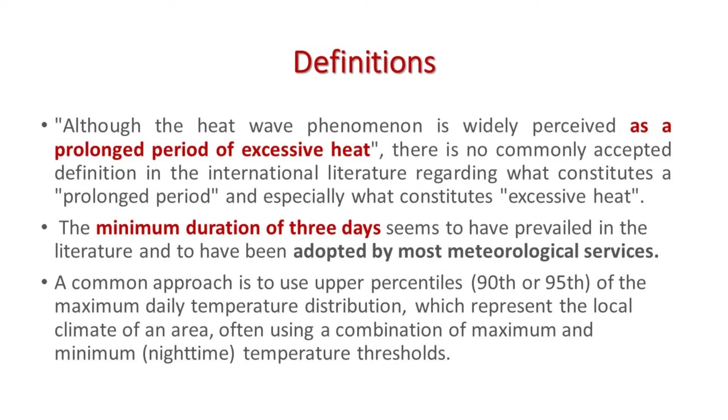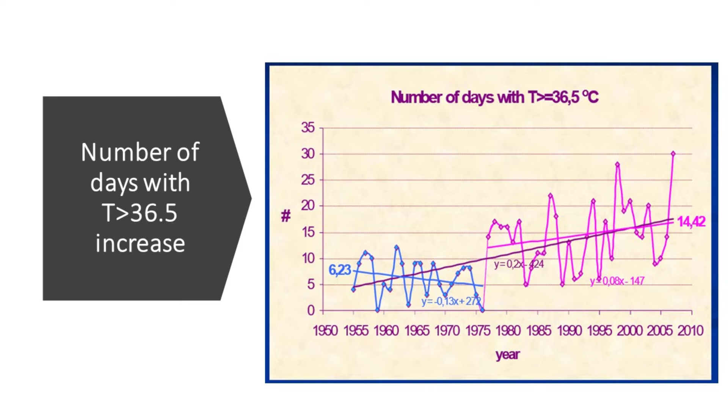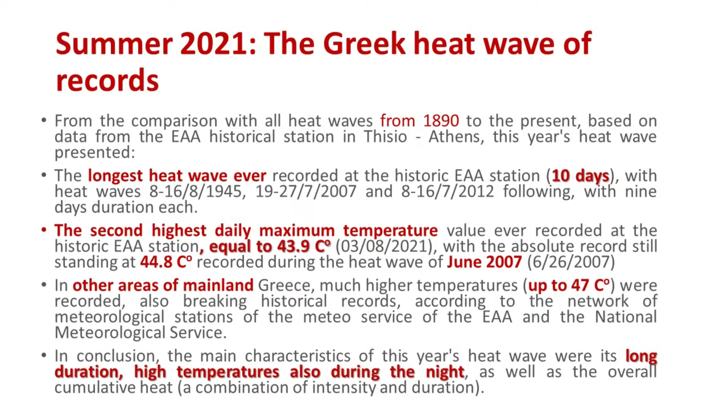And we arrived at summer of 2021. The Greek heat wave recorded was really the longest heat wave ever recorded in Athens. The duration was 10 days, and it had the second highest daily maximum temperature, equal to 43.9, almost 44 degrees, comparable with the first one in June 2007 at 44.8.

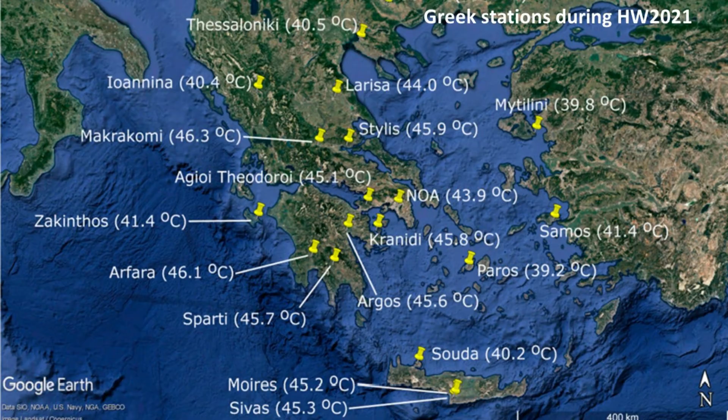In other areas of mainland Greece, we had even higher temperatures, up to 47 degrees, and the conclusion was long duration, high temperature also during the night, as well as all the cumulative heat that we had all over Greece. As you see, from Crete we had a temperature of 45 up to Thessaloniki with 40.5. It was really a nightmare.

As you also had this summer in France, we had fires everywhere in Greece, and the result, as you see especially in Evia Island, was a really big ecological disaster.

So if we go back and try to understand bioclimatic architecture and popular knowledge, we see that the construction of buildings once upon a time functioned as living organisms in direct connection with their natural environment, presented as a capable solution to the energy and social crisis of our times.

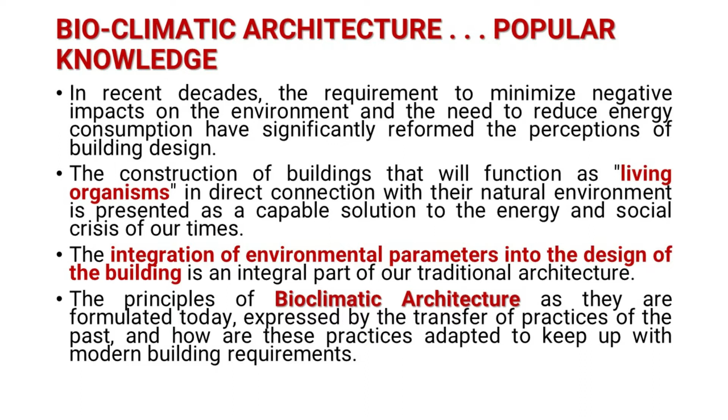The principles of bioclimatic architecture, as formulated today, are expressed through the transfer of practices of the past, and how these practices are adapted to keep up with modern building requirements. This is a good example of modern bioclimatic architecture, emphasizing limiting energy consumption from non-renewable sources, saving water, avoiding overheating of buildings, and of course the choice of building materials and methods with ecological criteria.

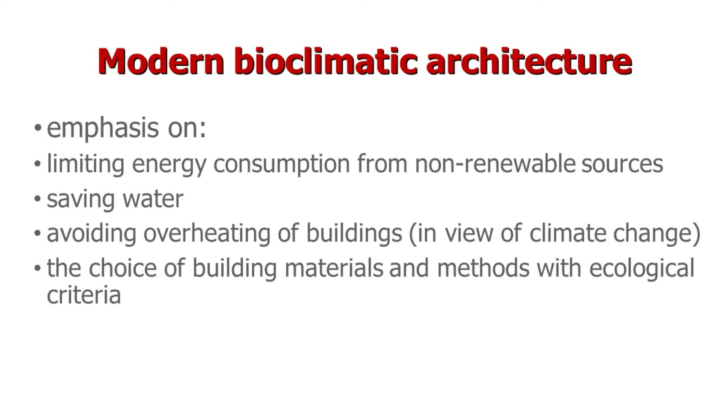We have really made very big progress in how we can build with bioclimatic processes and principles. The question is what could be useful to our new vision of environmental protection from the traditional folk architecture in Greece.

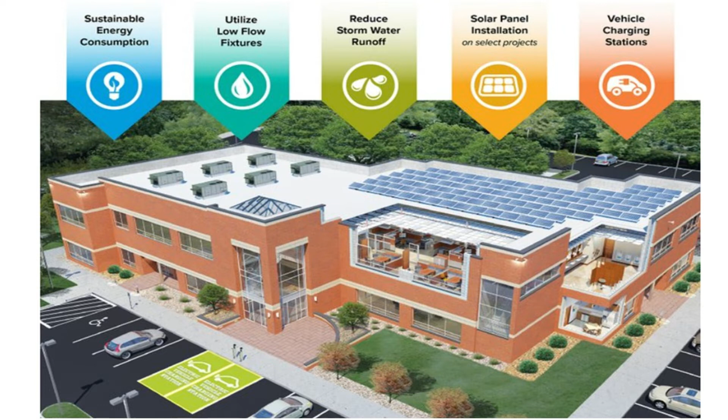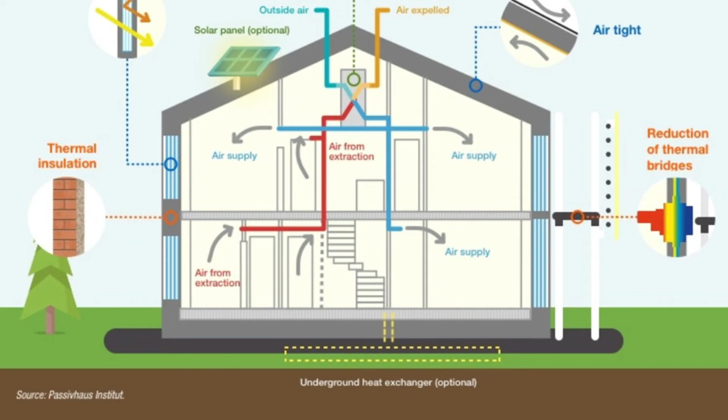The characteristic of traditional architecture in Greece was freedom, improvisation, and independence from any style or theory. The traditional builders, guided by weather conditions, the economy, and the available materials of their region, adapted their techniques to the conditions of their place in a natural and effortless way.

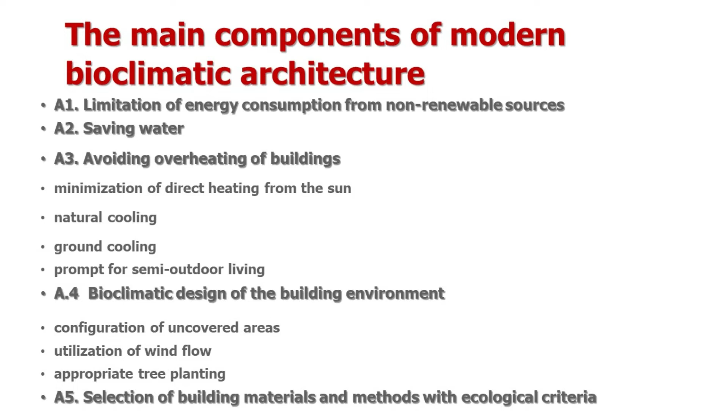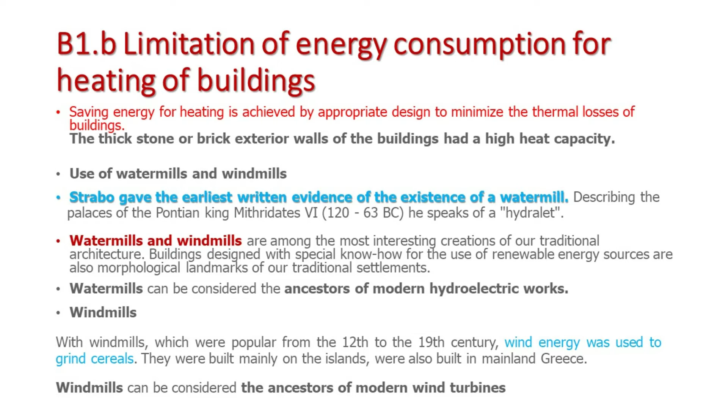For centuries, we used also water mills and windmills, and actually the first written evidence about the existence of a water mill in Greece was from Strabo, about the palace of the Pontic king Mithridates, around 120 to 63 before Jesus. And all those water mills and windmills had really something to add to settlements, traditional settlements. Especially the water mills can be considered the ancestors of modern hydroelectric works that we have actually, factories. And the windmills can be considered the ancestor of modern wind turbines.

And we passed to the save water and cisterns that it was really important, especially for the Cyclades islands, because the lack of water was really tremendous. The saving of water in traditional buildings located in areas without rivers, like the Cyclades islands, was carried out by collecting rainwater in cisterns. The cisterns are located in the basement of the building, and there were also outdoor cisterns that were covered. The rainwater is mainly collected on flat roofs and led by kiugia, the Greek clay channels, to the cistern.

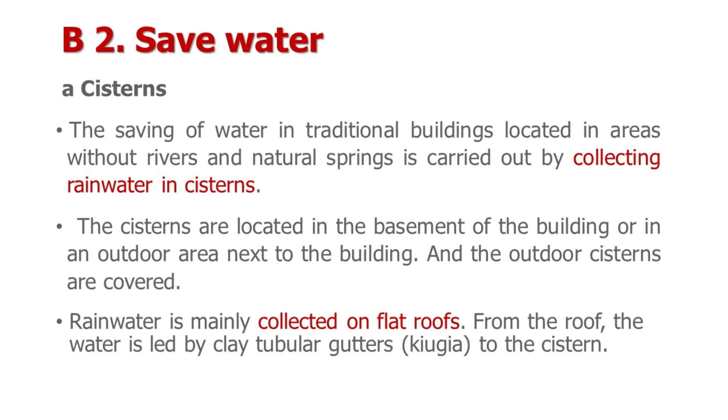Perhaps, obviously, a lot of you have visited already Santorini, but due to their soil, that was volcanic, Santorini has an impressive cistern labyrinth of a lot of cisterns that really gives a lot of water from rain every year.

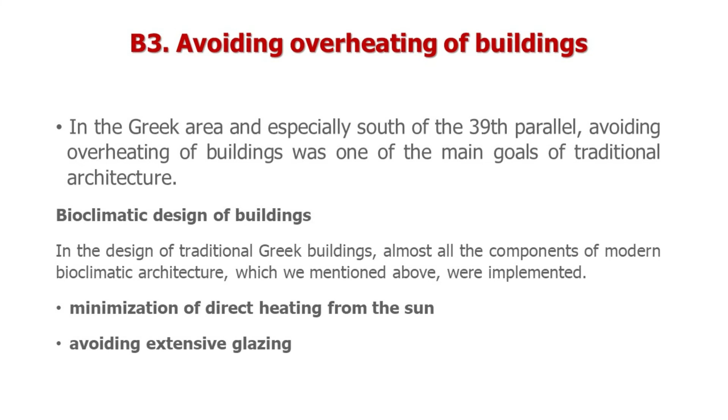For avoiding the overheating of buildings, we use techniques to minimize the direct heating from the sun. So most of the houses in Cyclades are white because most of the long wavelength solar radiation is reflected and does not heat the building. And modern researchers refer that the example of Cycladic settlements and other settlements in the Mediterranean have, for centuries, protected people from heat waves.

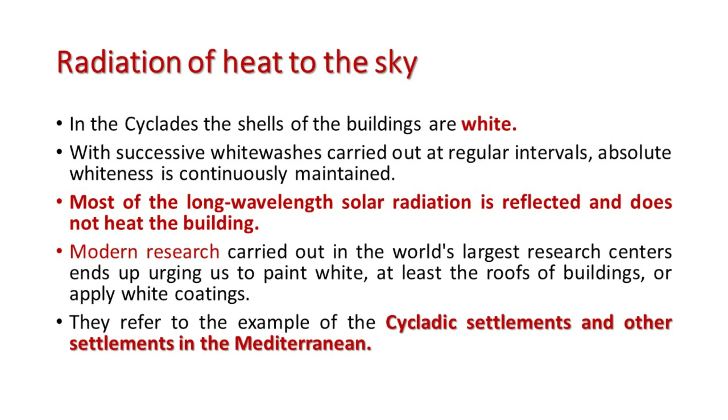Another technique is external shading by canopy with arbors, as well as planting suitable plants in suitable positions. And also, the building is protected with natural cooling techniques like openings. The main openings were placed on the south and east sides of the building, and the small openings were created in the highest part of the external walls, mainly opposite the main openings and on the north side. By that there was through ventilation, north wind entry from the north face, and even cooling by hot air from inside that went out from the building.

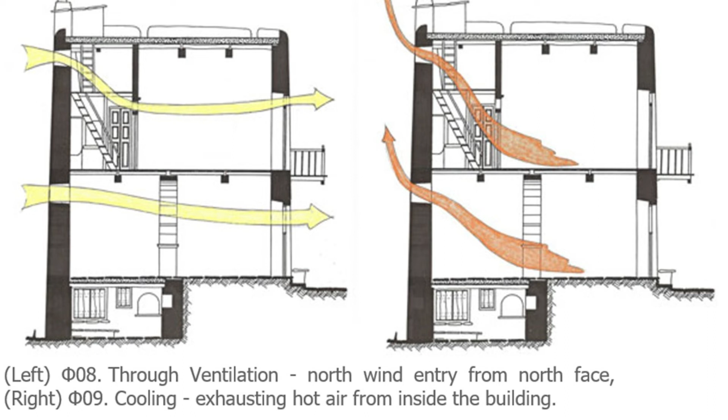So passive cooling systems were also from the ground, and this is a big discussion actually with modern bioclimatic architecture, how we can gain, especially in our era when we have problems with energy, passive cooling systems in our houses.

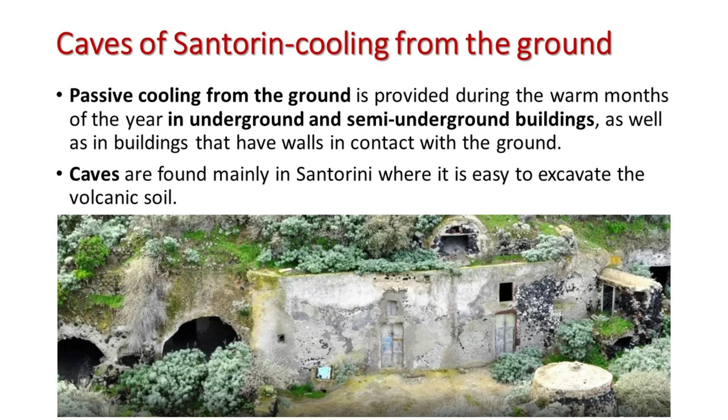Caves are found mainly in Santorini, where it is easy to excavate the volcanic soil, and even in the main city, actually, you see cave houses until now.

But most important is that in Greece we used to live outdoors, and people for most months of the year prefer not to live indoors, settling in spaces that have at least one side open to the outdoors. This is called in modern architecture semi-outdoor living. Hayati in Arabic means life, and we put a lot of activities of daily life in a semi-outside environment.

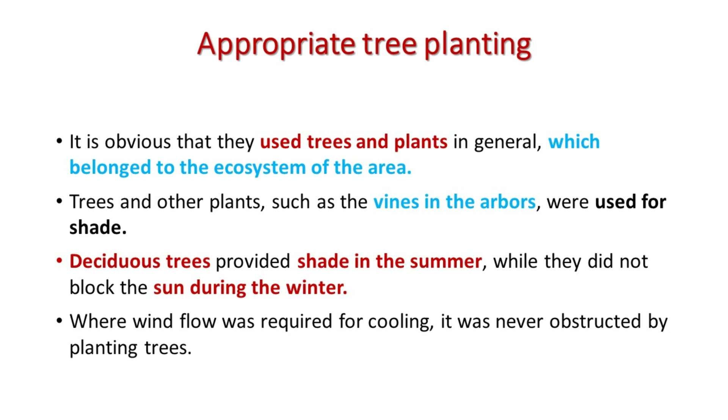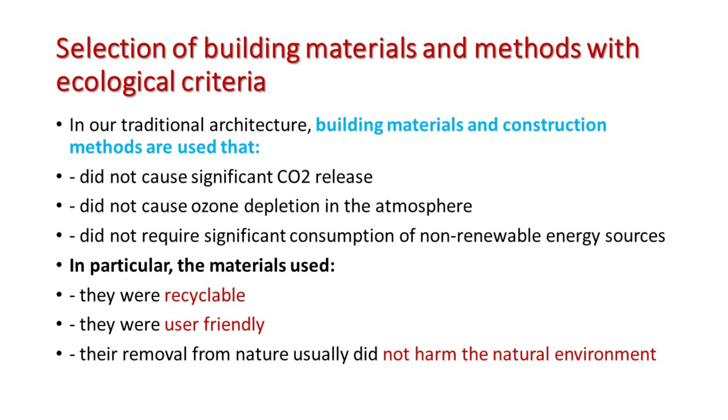Okay, Miltos. So we understood the message. We have to. It's very beautiful. It's the trees of hope, les arbres de l'espoir.